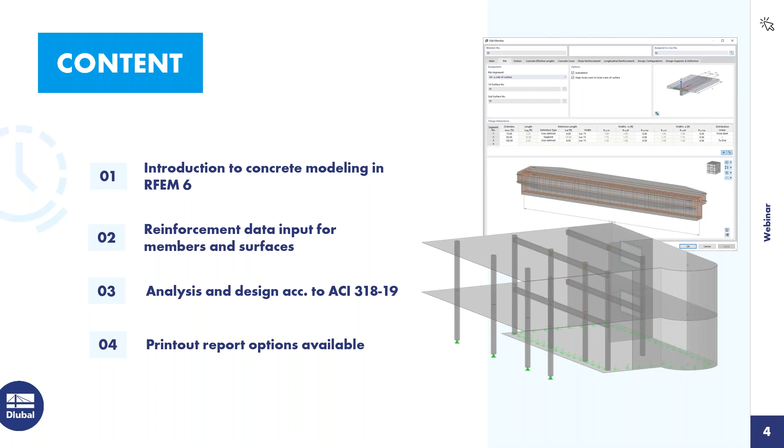As far as the content over the next hour today, we're going to move through a couple of examples, and we'll be working in our new FEA program, RFEM 6, as well as utilizing the concrete design add-on. So I'll give you a quick introduction to concrete modeling within our program. We'll take a look at reinforcement data input for both members and surfaces. We will be running an analysis and of course design according to the ACI 318. And finally, at the end, I'll show you a few printout report options that are available within the new program.

So we'll actually begin immediately within RFEM with our first example. When we begin a new file, we want to give it a model name. The type of model is set to 3D. On the second tab, you'll notice here are all of our add-ons. These add-ons would only be available if you've purchased them. Today we'll be focusing on the concrete design. You can see I've activated it here.

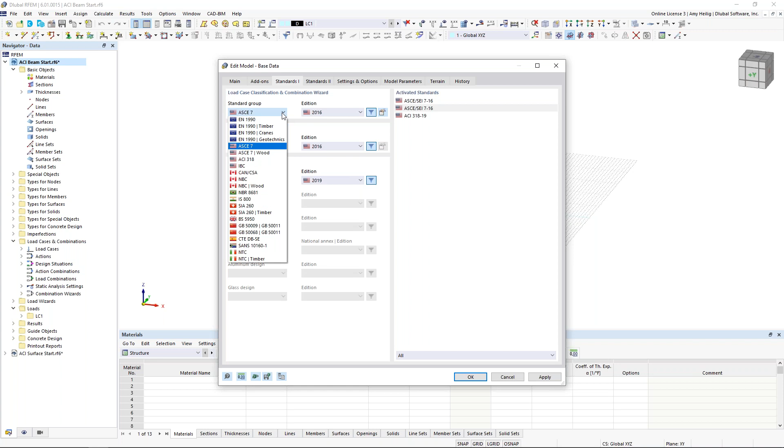Under the third tab, standards, this is where we can select the relevant concrete standard since we've activated that add-on. Today we'll be working with the ACI 318, but you can see here the Canadian standard, the Eurocode, and other international standards are available. As far as our load cases and combinations, we'll be working with the ASCE 7, but of course we can use our drop-down to select a different standard there.

And finally, under the settings and options, this is where I can orient my global and local axes. You can see I've set both of these Z axes to upward for the model here. Once we are done defining this basic information, we are brought into the main program RFEM here.

We want to start off with our drawing grid, which we can right click at the grid down at the bottom to edit. You can see that I have my grid point spacing set at 1 foot. If you have anything else here, you can either reset it or you can choose this option here, default. That will move it back to 1 foot on spacing.

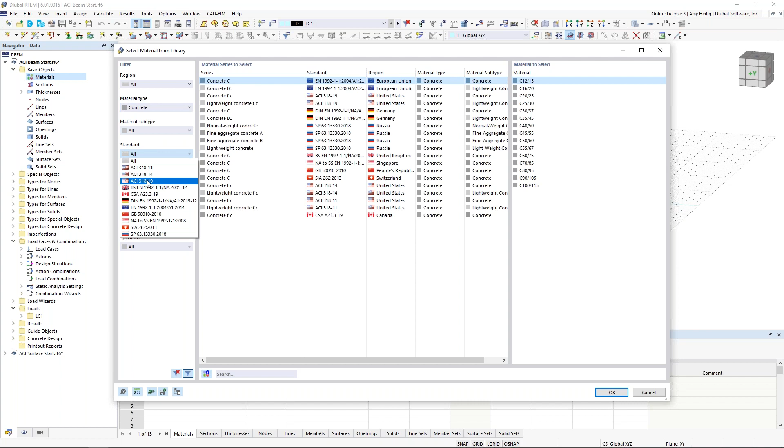We want to begin by defining a new material here. So we will right click within our navigator under the material to create a new material. This will open our dialog box within the program. We can then access our material database and we'll take advantage of the filters over here on the left. Within my drop down, I can choose concrete, I can select the standard ACI 318-2019, and from here I can choose my 4000 PSI concrete.

Notice on the second tab here with this concrete material, we also have the settings for creep and shrinkage. This comes into play a little bit later on with the serviceability design for long-term deflection if we wanted to consider that. We'll go ahead and leave this unchecked for our example today.

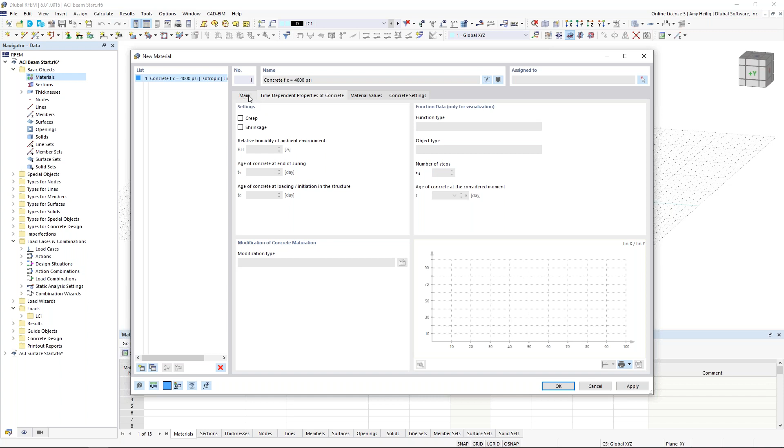Now, while we're still in this dialog box, we want to create a second material. So we once again visit our material database, and over on the left, we use our filters to reinforcing steel. Again, selecting the ACI 318, we can now choose grade 60. This is a little bit different in RFEM 6 than what we saw previously in RFEM 5, where we do want to go ahead and define that reinforcing material here for our concrete elements. Once those materials are defined, we'll see them over here within the navigator tree. Now we want to do the same thing for our first cross section.

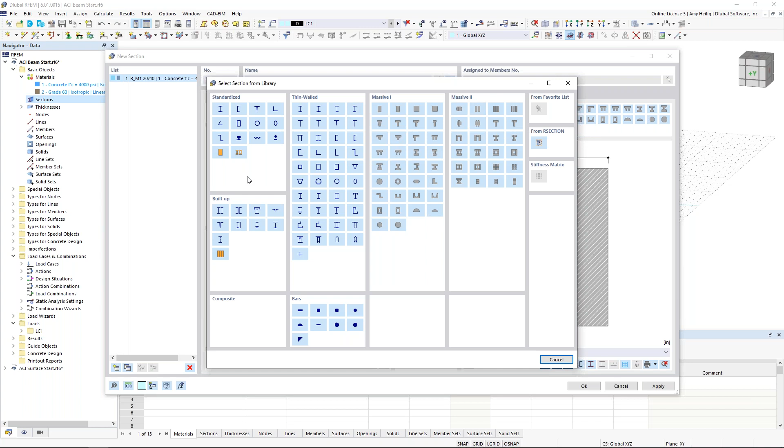So I can right click on the section here, go ahead and choose new section. And we'll see some of the various massive shapes available to us on the right. We can always visit our database here to choose from the library the various thin-walled and massive cross sections. We also have all of the available sections from the steel standards, aluminum, and so on.

But sticking with this basic rectangular section, under the second tab here is where we can go ahead and modify these dimensions at 12 by 18. The third tab will, of course, calculate all of the cross-section properties for us automatically. So we click OK, and now this section is available to us, and we want to begin by drawing our first member. So I can go up here to my toolbar to draw a new single member.

And what you'll see here is the member type is set to beam. Now notice the design properties is automatically checked on here. This is all related to that concrete design add-on that we activated within the base data. When we have this unchecked, notice all of these tabs disappear up here at the top related to our reinforcement. We will only perform an analysis if this option is not checked. But of course, we're also interested in the design portion for our example today. So we'll go ahead and leave this turned on.

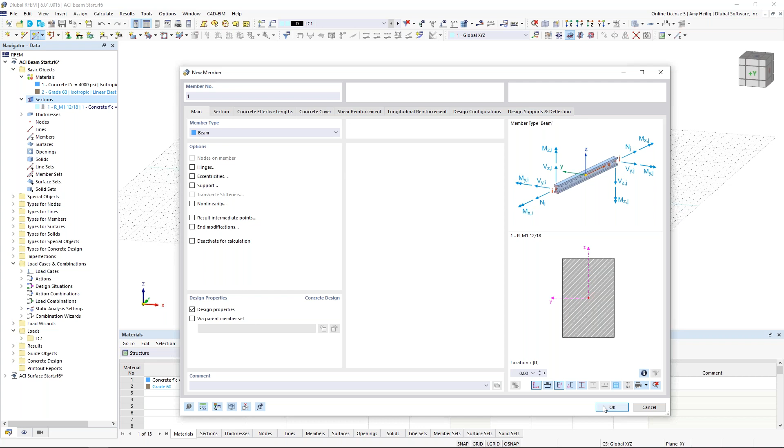We'll get back to some of these various tabs here in just a minute, but starting with the basic geometry here, I'm going to snap from my point 0, 0, 0, and my second point will be at 26, 0, 0. So we have our first beam element shown here.

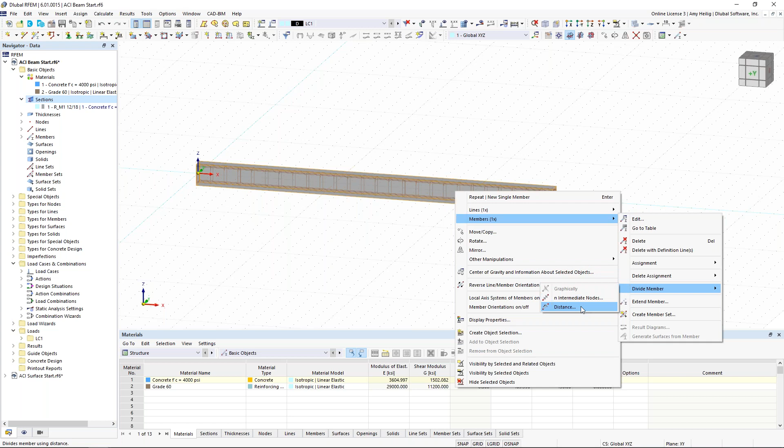Now I want to add a node along the member length here. So I'll right click on the member, and under members, we have the option here to divide the member by a distance. Within this dialog box, I can tell the program to go ahead and place that intermediate node 20 feet from the member start. But rather than dividing the member itself, I can choose this option down here to actually create the node without dividing it. So it will remain one continuous segment. I click OK. I can turn this into wireframe view, maybe turn off my grid. I can zoom in here and you'll see this node added along the member length.

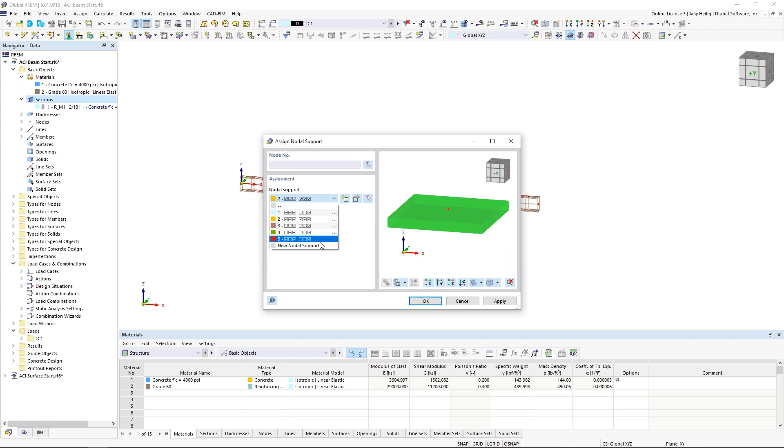So let us continue on by supporting this simple beam. So we'll go up to draw a new nodal support. And we have some default options within the program here, such as a typical pin support, maybe a typical rigid. We can also create a new support definition. So within this dialog box, we have our 6 degrees of freedom, 3 in translation, 3 in rotation. Now we also have partial fixity. So if we have something that's not fully fixed, not fully released, we can go ahead and define that spring constant there. And lastly, because RFEM is a nonlinear program, we can define these geometric nonlinearities for the nodal supports within our third drop-down box here.

For our first nodal support, we want to restrain the rotation about the global x-axis, which I can see back here in the background. I click OK for that first definition type, and then I can graphically select my node here, node number 1. Now notice I'm still within this dialog box. I can click Apply, and I can create a new nodal definition once more. This time we're going to release the translation in the global x direction for a roller. I click OK. I can graphically select my intermediate node here, and I click OK once again, and now our nodal supports are shown here at both these nodes.

Now, something new that we've added within RFEM 6, you can always right-click at one of these nodes and take advantage of this slider option to increase or decrease the size of those nodal supports.

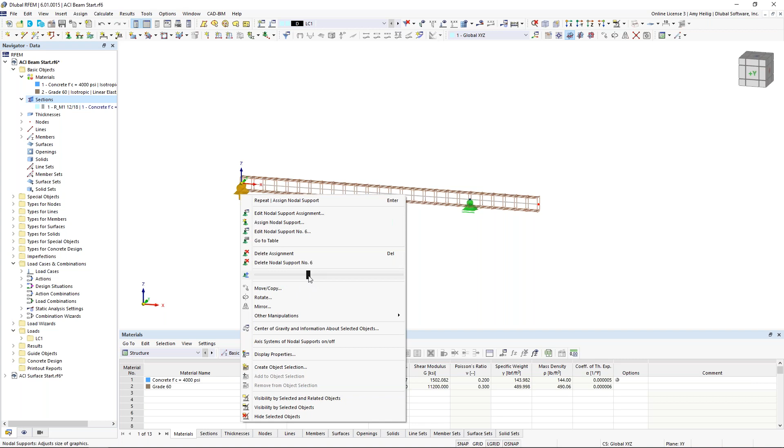Okay, so now that we have the basic geometry defined, let us move on to loading. Now notice the program has already created one default load case here. So if we go into this option, Edit Active Load Case, we can go ahead and rename the load case Dead. Now the self-weight is automatically activated here. The action category is set according to the ASCE 7 to dead load. So for our second load case, we will create this as live 1. The action category will be set to live. The self-weight will be automatically unchecked here because we don't want to account for it twice.

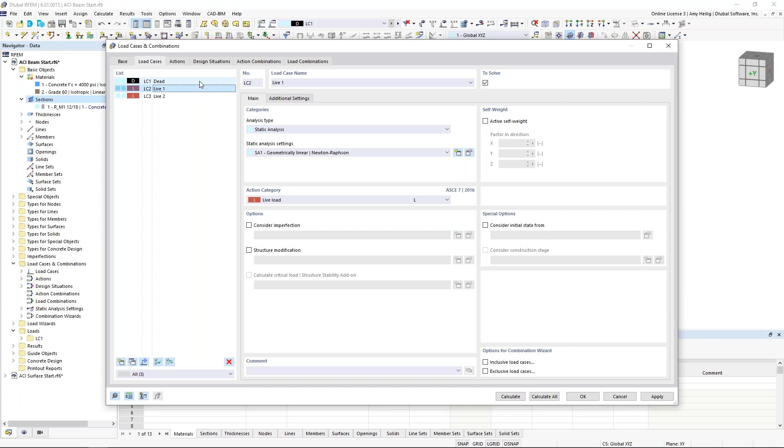And finally, for my third load case, I'll make a copy and simply rename this one Live 2. Now that all 3 of our load cases are defined, I want to take a step back here.

Under the first tab, Base, we will generate those load combinations automatically according to ASCE 7. This is what we set under our base data, but we can make a change to a different standard here. I also like to activate the option for combination names according to the action category.

Under the actions, we have both dead load and live load defined. Because we have 2 live loads under our load cases, we need to tell the program how to combine these within the load combinations, whether that's together, separately, or alternatively. We can choose those options from the drop-down box here.

Then we have our design situations, and this is new within RFEM 6. We have two design situations created, and these will be used for our concrete design. Notice we have LRFD for our factored load combinations and ASD for our unfactored load combinations. Both of them are active here for the concrete design add-on.

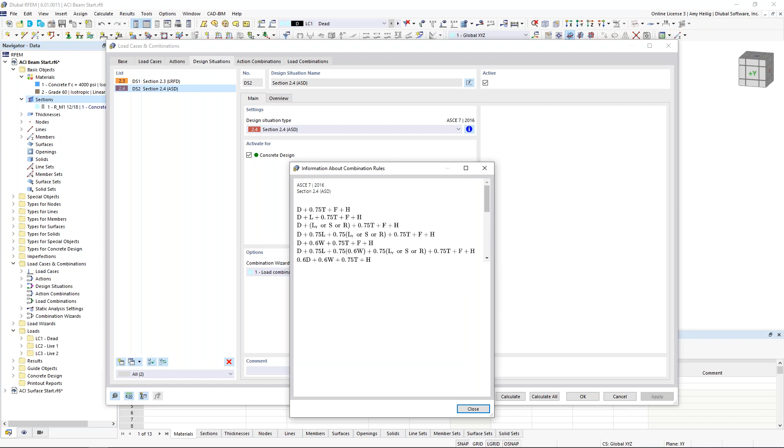Now, if we're curious to see what these load combinations look like, referencing the standard, we can click on this little info button here, and now we can see all of the load combinations in detail.

But there's something we also need to take care of within this combination wizard that's important for concrete design. For our factored load combinations, which will eventually be used for our strength limit state design, we know that we need to apply this I-crack factor that comes directly from the standard to reduce the stiffness. That's all done here within the combination wizard.

So I can go to the edit settings here. Notice the static analysis settings is set to a second order analysis with P-delta considered, which is great - that's exactly what we're going to be utilizing today. But we also want to turn on this option down here to consider the structure modification.

Now I need to create a new structure modification. I'll activate this for members since I only have one member in my simple model. Within the tab that appears here, I need to use the drop-down box to create a new member stiffness modification. And sure enough, within this drop-down box, we see the ACI 318 table 6.6.3.1.1A listed.

This is just going to reference the code to give you the I-crack factors for the various component types here. For today we obviously have a beam, so the I-crack factor of 0.35 will be applied to the bending stiffness here.

So I can click OK here, and then I'm going to want to either type in my member number or I can graphically select it. I click OK, and now for my factored load combinations, the I-crack factor will automatically be considered.

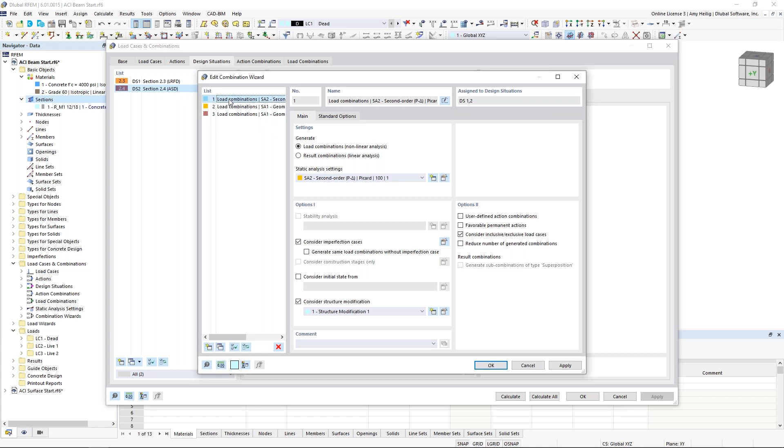Well, that's easy enough. If I go into my combination wizard and create a new definition here - previously for my factored load combinations, I was using item number 1 here with my structure modifications active.

Now for my third one that I just created, we want to choose a second order analysis according to P-delta, but I will actually leave this turned off. The concrete design add-on will go ahead and determine the effective moment of inertia I sub E for deflection calculations automatically. So nothing needs to be done here with serviceability or deflections for the ASD design situation.

We just simply need to deactivate those settings here under that third definition. So now under the load combinations, we can see our factored load combinations in orange, and notice the structure modification, that I-crack factor, is applied to these. Our unfactored load combinations here in red, this setting is turned off.

So now that we have defined the load cases and combinations, we need to actually apply the load to the member. We'll start off with a new member load within our toolbar here. The program asks us which load case to place this member load under - we'll choose dead load. Up pops our dialog box where we can simply define the load magnitude of negative 1.0 kip per feet.

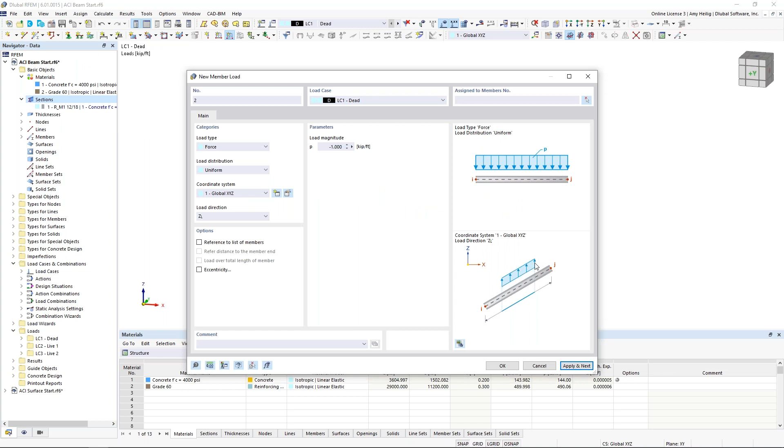And this will be applied along the full length of the member. I can graphically choose this member or type in member number 1. I hit apply and next, and notice in the background that load was applied, but I'm still within this dialog box.

What this allows me to do is drop down to load case number 2. I'm going to change the load distribution here to trapezoidal, and adjust my load magnitude at the start to negative 0.2. The end will also be negative 0.2, but I want to make sure to apply this only from point 0 to 20 feet on my beam. I'll type in member number 1, apply and next, and in the background we should see that live load applied only between our 2 nodal supports.

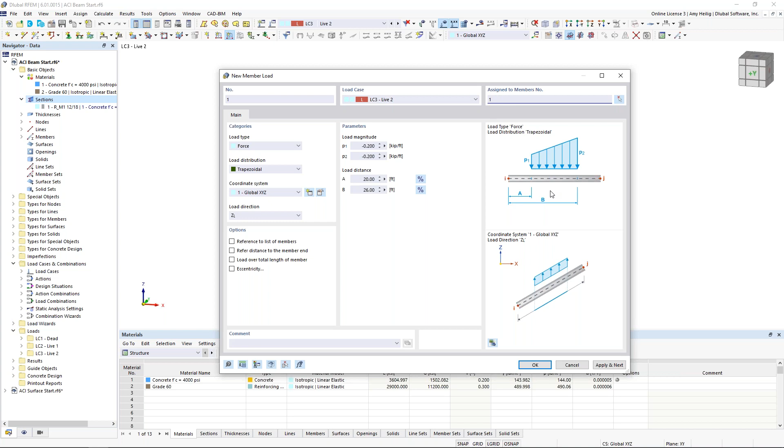Finally, we want to do the same thing with load case number 3. We're going to leave the load magnitude the same, but adjust this to start at 20 feet and go to 26 feet. We go ahead and hit member number 1 here on our keyboard, click OK, and now we should see that additional live load defined here.

Now within my drop-down box, I have the ability to cycle through these different load cases and combinations to view the loads applied to my beam, also including the load factors from the ASCE 7.

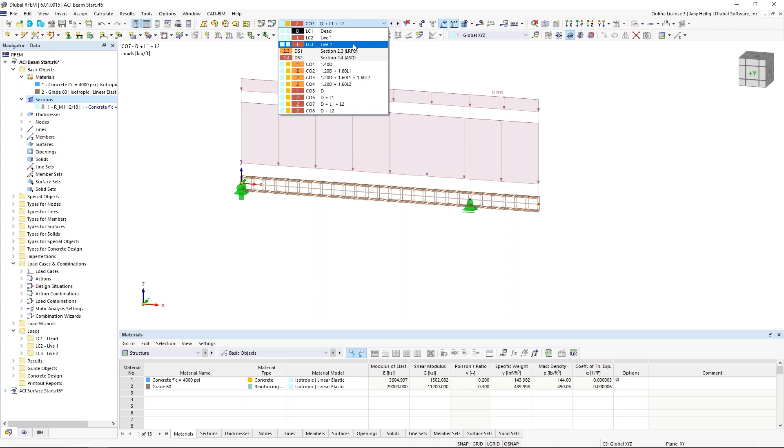Okay, so what we can do now is choose this LRFD design situation, and I can actually run a quick analysis. Remember, I haven't modified my reinforcement yet, so I'm not really doing the design quite yet according to the ACI. The program put in some default reinforcement to begin with.

But looking at just these static analysis results, notice we have a new tab here within our navigator, grayed out because it's the only thing we've solved for, but it says static analysis. We're probably not so interested in the global deformations for these factored load combinations, but what we can take a look at are topics like internal forces. You can think of these design situations as an envelope solution, grouping together all of those factored load combinations.

What you'll see here are 2 different values for all of my internal forces. These 2 values just refer to the envelope values, and currently I'm viewing both the max and min, but I can set this to only the max or only the min, and we'll see that adjust graphically. We also can display the support reactions. Again, these are just the internal forces, probably what we'd want to use to do our design according to the ACI.

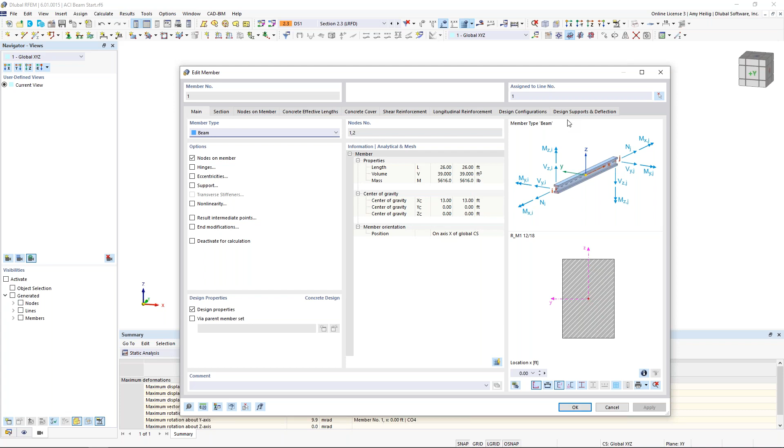So moving on to that topic, let's double click on this member to explore these other tabs up here at the top for our reinforcement definition. The first tab is the concrete effective lengths. I'm not going to touch anything within this tab, because when we don't, it's going to design the member according to a P-delta analysis. That is one of the approved methods within the ACI standard.

Now, alternatively, if I do define an effective length within this drop-down box, it will design according to the moment magnification method, also from Chapter 6, an approved method. But we'll go ahead and design according to P-delta today. Therefore, under our concrete cover, we can leave this as 1.5 inches, which is default here.

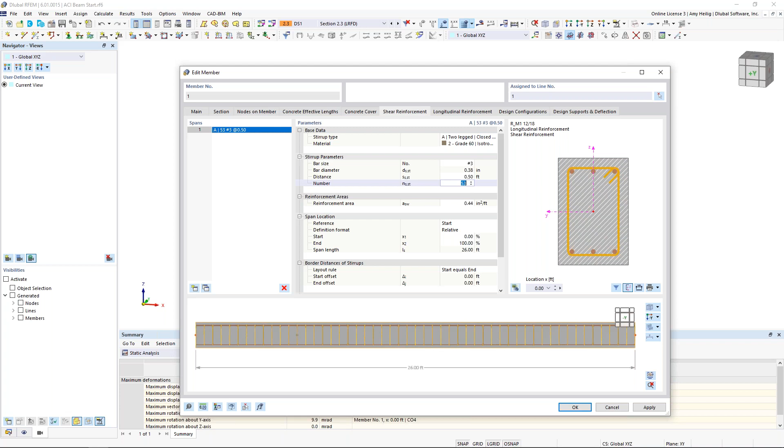Our shear reinforcement allows me to define different zones if I want along the member length. Notice I can create these different zones and adjust my shear reinforcement as needed. For our example today, we'll just go ahead and utilize these number 3s, but I'm going to modify my spacing at 0.5 feet, or every 6 inches. Notice this picture down here automatically updates with my shear reinforcement, applied along the full member length.

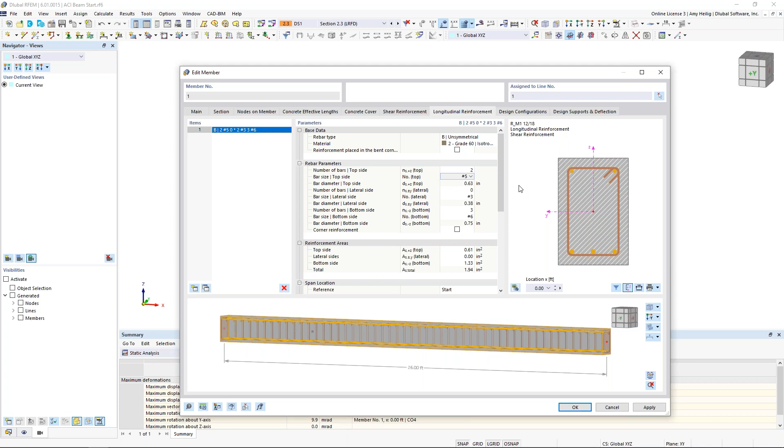Under my longitudinal reinforcement, this is where I'm going to set the longitudinal reinforcement as shown in this graphic, this cross section. I can use my drop-down box to choose unsymmetrical. This option gives me the ability to define 2 number 5 bars at the top of my beam, and we can see that picture update here. Along the sides, I'd like to define 1 number 4, again seeing those lateral bars update in the picture.

And then finally, we want to update the bottom. We'll go ahead and choose 5 number 5s from my drop-down box here, and we see those 5 number 5s shown within the cross section. So this is going to be applied along the full length of the member here.

What else we can do is define a little bit more information, such as reinforcement offset, but also anchorage type at the start and member end. This is all going to come into play for our development length design checks within the ACI, so we can make adjustments there. For now, I'll just leave this as empty.

Now, we of course have some additional positive bending moment in between these two supports, so perhaps this reinforcement isn't completely adequate, and we'd like to add some additional bottom reinforcement only at this location.

So what we can do here is create a new item. Up at the top, I'm going to choose from my drop-down box here the option D line, then choose 4 number 6s. Then I want to adjust my offset distance. This is all measured directly from the stirrup, and we can go ahead and modify this at 0 and 1.7. Then for the right-hand side of this line reinforcement, it will be 0 and 1.7 again.

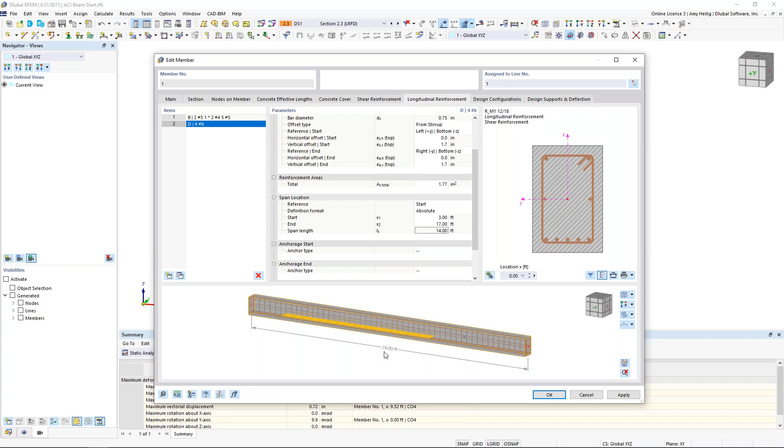Okay, so now we see that additional reinforcement, but right now it's shown along the entire length of the member. I'm going to actually modify this to begin at 3 feet and end at 17 feet, and now we can see the reinforcement shown here, which will coincide in between the two nodal supports.

Now, similarly, we probably have a negative bending moment over this intermediate support here and into the cantilever portion, so we'd like to add some additional reinforcement for the top of our member. So let us once again define here the option D for line, and we're going to choose here 2 number 5s.

Now, for this option with our offset distance, we want to use the drop-down box here to choose center, top, positive Z. Then I'm going to modify my offset distance to negative 1.2 and 0. I'm going to choose the same option here, center, top, positive Z, and this is going to be 1.2 and 0. So now we can see that additional reinforcement at the top shown here.

Now we don't want to run this along the entire member length. Rather, we are going to choose a distance here of 17 feet to 25.5, and now we have the additional top reinforcement defined over that intermediate support. So that will be all that's needed for this particular tab.

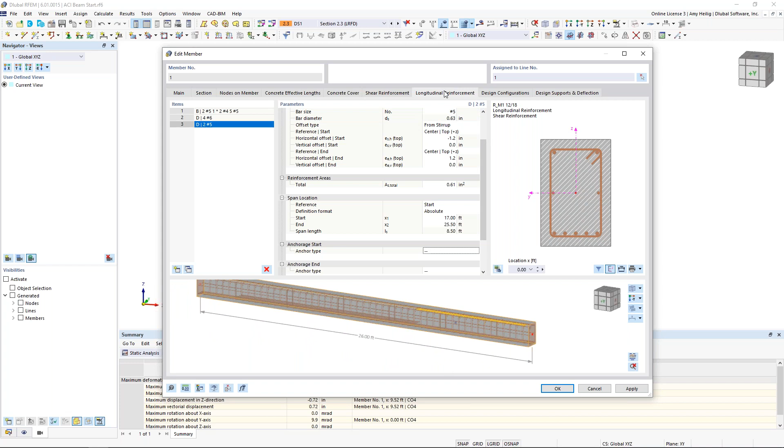So we'll move on to design configuration. We have strength configuration and serviceability, both coming with a default option. We can go ahead and edit the settings for this default. What you're going to see here are just the various options specifically for the ACI on what we can turn on and off for the strength limit state, such as strength reduction factors, and some minimums and maximums to consider directly from the standard.

Now the stability tab here is related to the moment magnification method. We're not running that for today, so nothing to take care of here.

As far as the serviceability configurations, if we take a look at this, you'll notice initially we're going to be checking the crack analysis. So what this is going to allow us to do is take into consideration section 24.3.2 from the ACI to make sure that our spacing of our longitudinal reinforcement meets the code requirements.

Now, additionally, we can turn on the direct crack width calculation. This is a bit more of a theoretical approach. It will utilize the Gergely-Lutz equation to calculate the crack width. We can compare this to the reasonable crack widths set forth by ACI PRC 224. So directly from that standard, we have some different options here that allow us to choose our limiting crack width. For example, dry air protective membrane, we can set this to 0.016 inches.

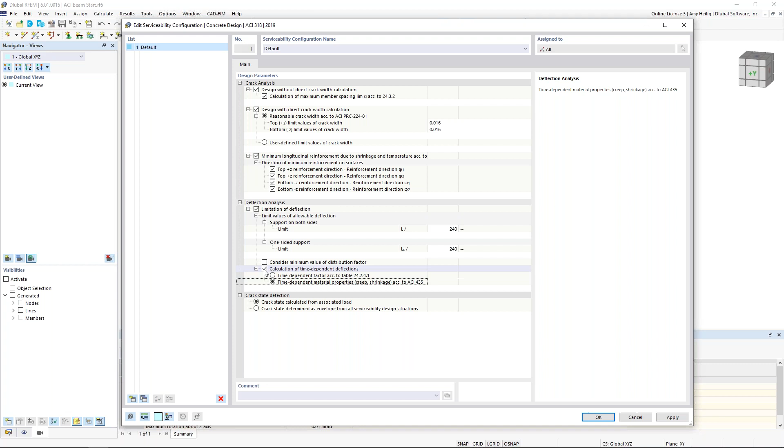So when this is turned on, we can choose the time-dependent factor according to table 24.2.4.1. This just applies a simple factor to the deflection analysis according to the ACI. Alternatively, we can consider creep and shrinkage here according to ACI 435. Now remember, I showed you the material properties itself allow you to define those creep and shrinkage properties. We'll go ahead and turn that off for today. We won't be considering long-term deflection, and we are done with the configurations here.

Now, the final tab is related to our design supports, and this is important for two different reasons. The first we'll start off with is deflections. So the program doesn't know which portion is supported on both ends, which end is a cantilever. So by defining these design supports, that gives the program the intelligence to recognize which limiting deflection ratio to compare the different segments to here.

And what we'll begin with is a new design support at the left-hand side. So I create this new design support. You'll notice the type is set to concrete. We give it a support width of 16 inches. The support depth is just set to the width of the member. We have a nice picture over here on the right-hand side, just referencing what some of these settings are.

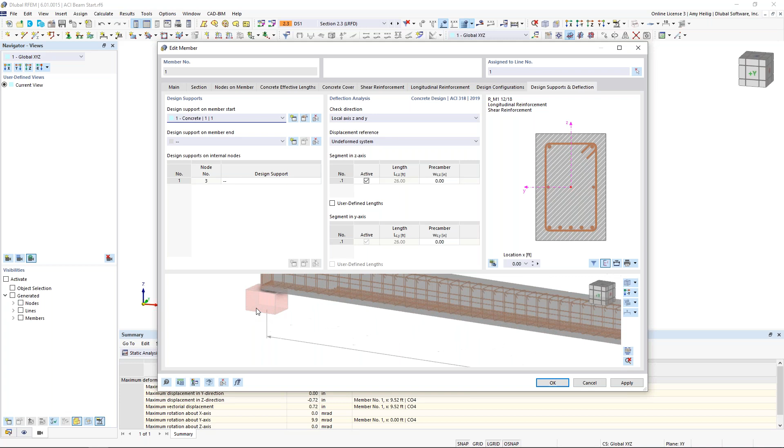Now we also have the ability here to reduce the moment. So we can set this factor for a moment redistribution over this support width. Now this is all related to the ACI section 6.6.5. So when we create that support width, we can automatically see it set here on our first node of our beam. Now we also want to set that design support on the intermediate node along the member length.

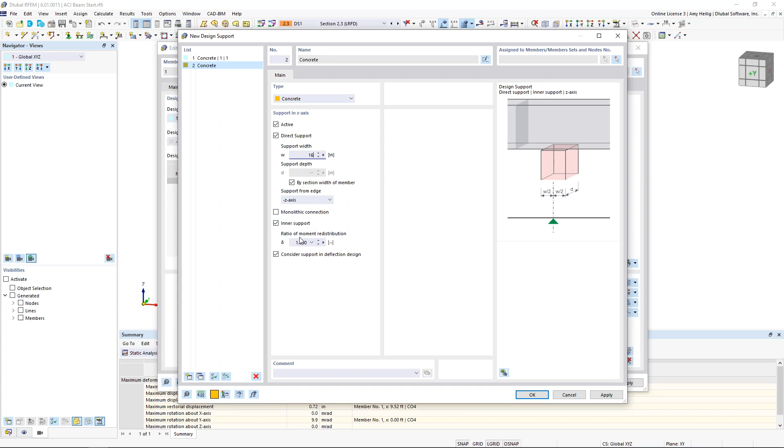So we can do so here at node number 3 by either selecting the support we already defined, or we can create a new definition. This one will also be 16 inches in width, but I want to set my ratio here, maybe 0.75. I click OK, and now we can see that nice design support shown here. So now the program will have the intelligence to recognize this is a cantilever portion out here on the right, and this portion here is supported on both sides.

Now, if you do not set any design supports within this tab at all, the program automatically defaults to a support at the member start and the member end internally. Now, these design supports are also important for a second reason, and this all comes to do with strength design when we're talking about topics like taking the shear internal force a distance d away from the support face. Well, this will all be considered now with these design supports that we've defined. Otherwise, of course, the program only knows the intelligence of taking the shear force, for example, a distance d away from the member start.

The information over here on the right is just related to the serviceability deflection checks. We can add in a pre-camber. We want to tell the program what is the reference length for our limiting deflection ratios, and that will sum up this particular tab here.

Okay, so now that we have finished all of these various settings, notice that the program has automatically updated my reinforcement. We can see those design supports shown here, and we can now move on to the design utilizing the concrete add-on. So within my table down at the bottom, I'm going to activate the concrete design here. So this is available because I have set this under the base data to turn on that concrete design add-on.

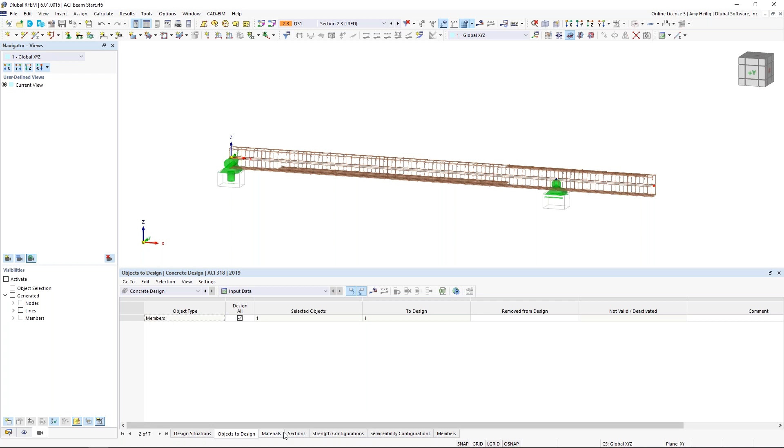Now the objects to design, we can see here we only have one element in the model, of course. The rest of these tabs are really just repetitive. It tells us our materials, our sections, so nothing to really do here. So we can begin by running our calculation directly within this table.

Now notice that the program will run through our load combinations here, and it's also running through the design portion. It solves pretty quickly, and we can see now we are presented with our results. So we're still within this concrete design add-on, and now within the drop-down box, I can look at my design ratios on my members. And here they are grouped together quite nice, showing the strength design, the serviceability, the reinforcing limits, and the detailing of the reinforcement.

All of the design ratios here are green. That's always a good sign rather than seeing red, which means we're over the design ratio of 1.0. We can also utilize these filters up here at the top. If we wanted to view maybe only the max ratio, we can select the max here. Otherwise, all of them will be shown. Now notice as I click through this, the big red arrow showing in this graphical interface here will determine where my controlling internal force is.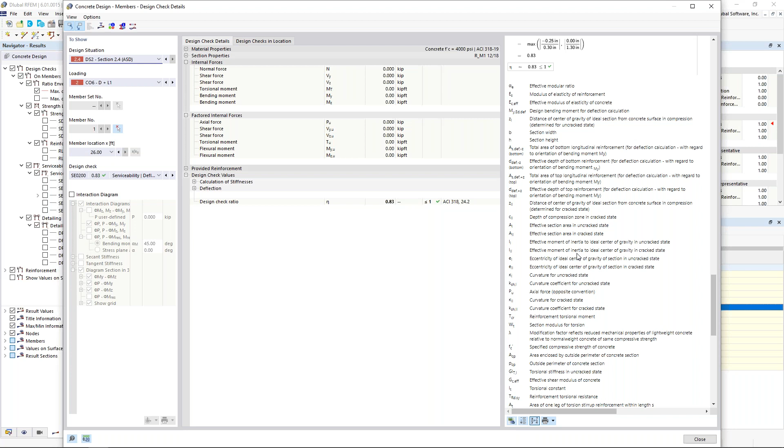The other new thing within RFEM 6, for any one of these design ratio checks, what I can do here is to visit my design check details. So this is going to launch this dialog box that is going to show all of my code equations here. So notice this one is pretty long and complex, but we show every single equation. Down at the bottom, we're going to give you every variable definition. We're also giving you all of the code references along the side as well.

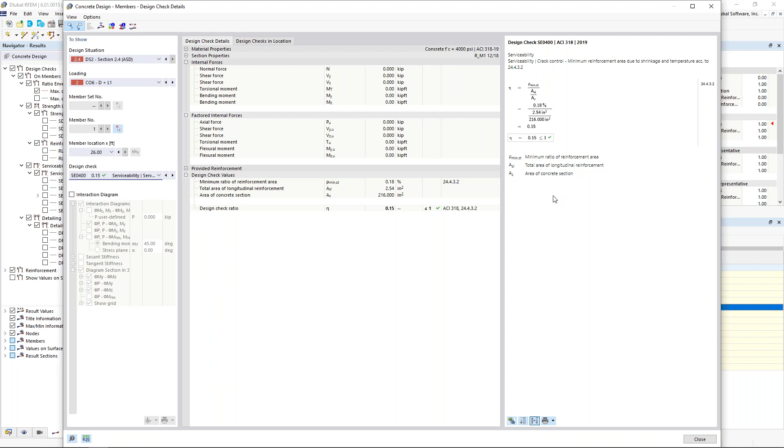So we can use any one of these checks here. Currently, we're looking at serviceability. We can take a look at any one of these other checks to determine the ratio here for our other various serviceability checks. Now, alternatively, we can take a look at any one of the strength design checks as well. Same concept. We're going to see all of those variables listed again with all of the code references.

What else is pretty powerful is we can view the diagram in section. And this is showing me which portions of this concrete section here are in compression, which are in tension, and we're also giving you the stresses for each of the rebar here. So this information is all available to us, of course, in our table format, but now we have this new drop down here for concrete design. And we can see if we collapse these trees that we have two options here, the design checks or the reinforcement. So let us take a look at the design checks first.

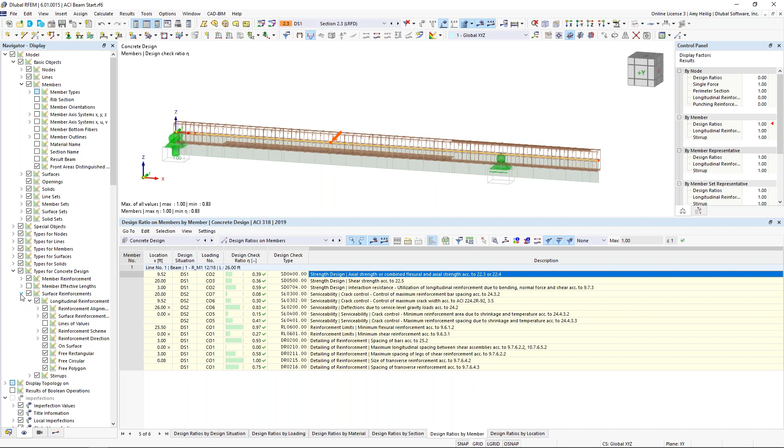Also, I can turn off my reinforcement on my member by visiting my navigator display options. And here we'll see types for concrete design, and I can turn off my member reinforcement. So going back to my member design check results here, I can turn off maybe the max ratio and turn on any of the various checks related to my color coding here, which all relate back to the table design ratios.

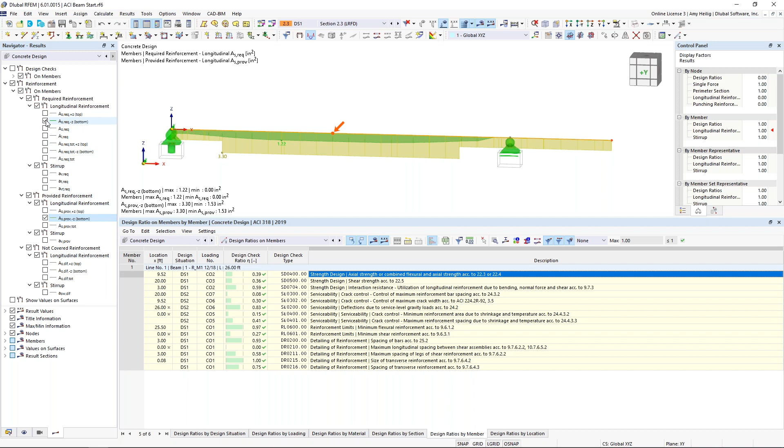Now, in addition to viewing the design checks, we also can take a look at the reinforcement along the member. And what I mean by this is we can view the required reinforcement at the bottom of the member. This is strictly from the analysis. Well, on top of this, what we can do is to overlay the provided reinforcement on the bottom. So what we would always hope to see, of course, is that the provided reinforcement is greater than the required reinforcement.

And in a similar fashion, we can turn on the required reinforcement for the top, which makes sense. We see it over here along the support and into the cantilever. What we can do is to overlay the provided reinforcement at the top. And again, this is greater than the required. So some various options there in terms of how to graphically view these concrete design results, both in table format as well as within the graphical options.

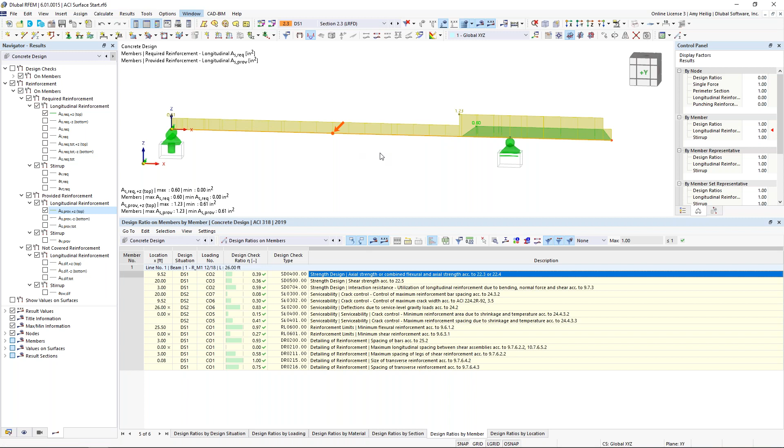So that will go ahead and wrap up our first example here. I wanted to give you an introduction to just a simple beam design. For our second example, let us move into a little bit more of a complex structure. So now we have an entire building here. We have columns, beams, walls, and slabs all defined with reinforced concrete. Now, the first thing here is I've already set up the load combinations, taking care of a lot of this information that we just did with example 1. Let us go into our design situations that we already covered.

So again, we have LRFD and ASD, and as we mentioned before, we need to set those I crack factors for our factored load combinations for the strength design. Well, I went ahead and did so. I just want to show you guys how this differs a little bit when looking at the structure modification here.

Now you'll notice I've activated both members and surfaces. We have two tabs up at the top, and I have set the I crack factor for my columns. I've selected all of the column members here. I also see my beams, and I've selected all my beam members. And under my surfaces, we have set the I crack factor according to the ACI for walls uncracked and flat plates and flat slabs.

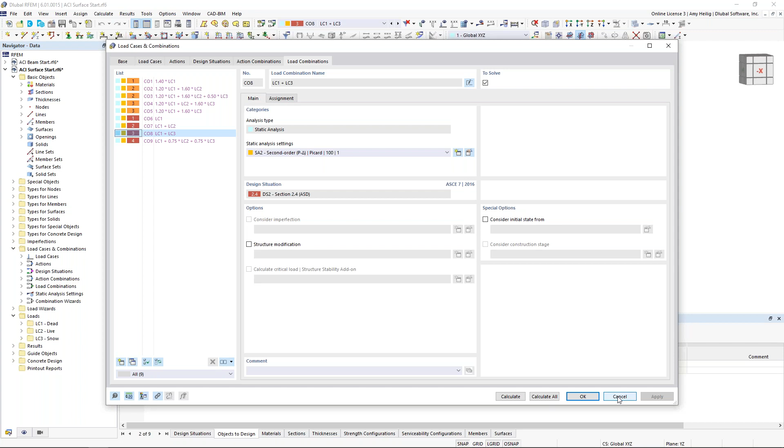Now, just to go into these detail settings, I also wanted to mention that in a similar manner, we have the Canadian standard here. It's the same concept for designing according to the CSA standard, so that option is also available here. Okay, so now that we have defined these structure modifications for our factored load combinations, I created an additional combination wizard for my unfactored load combinations, which should not have any stiffness reductions. So we'll see that reflected here within our load combinations, just like what we saw with example 1, but now we have many more elements.

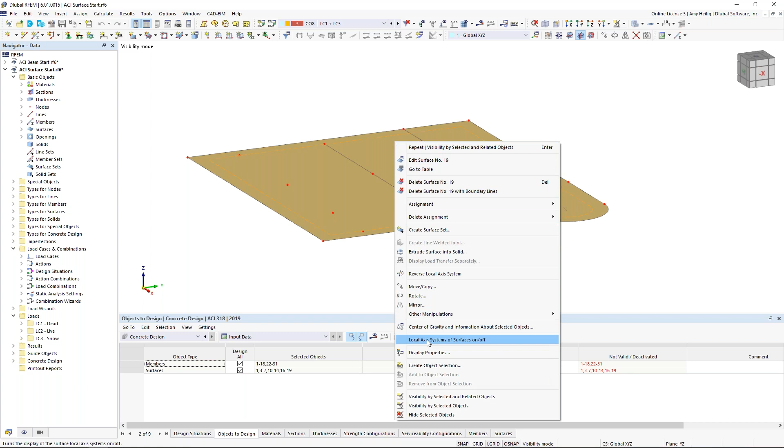So let us begin with the reinforcement definition for our first surface. And we'll choose this slab located here in the center. And I will go ahead and create a visibility by the selected objects. I'm also going to right click on this surface and I'm going to turn on the local axis system. Turn this to wireframe view as well. The local axes are important for the reinforcement directions, which we'll see in just a minute. So I wanted to go ahead and set us up for that. So all we need to do is to double click on the surface here.

Now, just like with the members, with the design properties turned off, which is the case with every single element within this model right now, we're only running the analysis. But when I activate the design properties, we see all of our additional tabs here where we can define our reinforcement for the design. So let us move to the concrete cover. And we'll begin by defining a new concrete cover of 0.75, just referencing table 20.5.1.3.1 from the ACI. Sorry about that. Okay, now the concrete design properties.

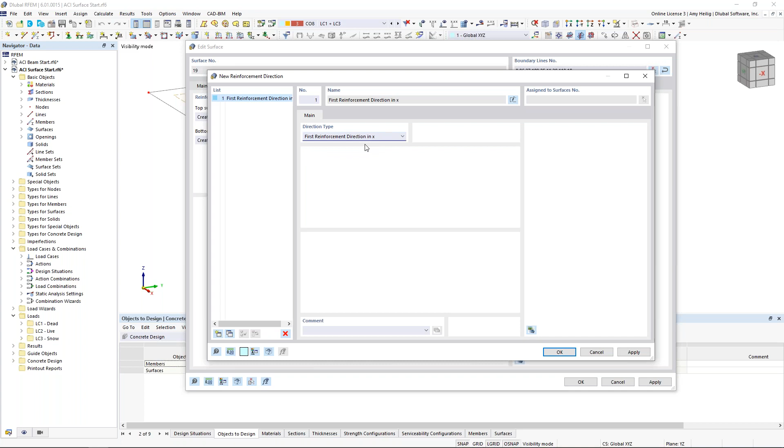This is going to be where we set our reinforcement direction. And we have no reinforcement direction defined right now, so let's create a new one. The reinforcement direction is going to be related either to the local x-axis or the local y-axis of the surface. So this is why I wanted to turn on the local axes so you can understand how the reinforcement direction is influenced by this. We'll begin with the local direction x for the top side as well as the bottom side. So we're utilizing the direction based on the local x-axis, and the transverse direction would be the local y-axis. Now, of course, you can rotate this too. It doesn't necessarily have to be in either one of those orthogonal directions.

For the surface reinforcement, we create a new definition here. And we're going to apply the reinforcement over the entire surface. My reinforcement material is already set at grade 60. The reinforcement type can be welded wire mesh, we have the library in there, it can be rebars or it can be stirrups. So perhaps we want to define some additional shear reinforcement around our columns, for example. But we'll go ahead and utilize the rebar option, and we will choose number 5s at 12 inches on center or 1 foot.

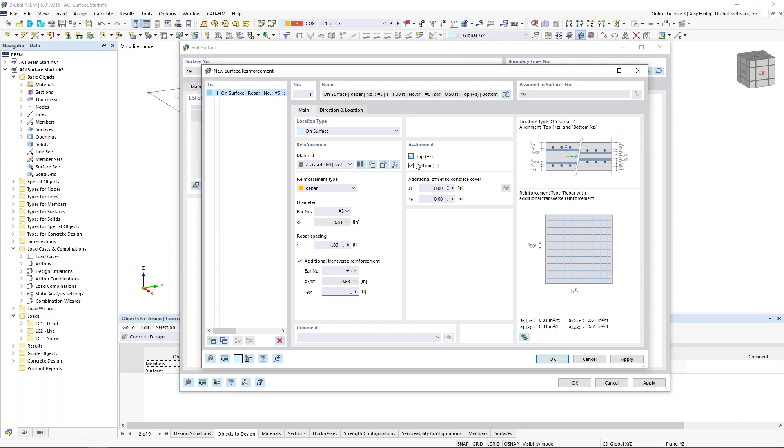Now, we also want to apply this in the transverse reinforcement direction. So notice right now it's only spanning one way. When we activate this, we want to choose number 5s, spanning 1 foot in the orthogonal direction here. So we see the picture update over here on the right. Now, we're applying this to both the top and bottom of the surface. So I've created this first definition type here. We can see it populate here within our table.

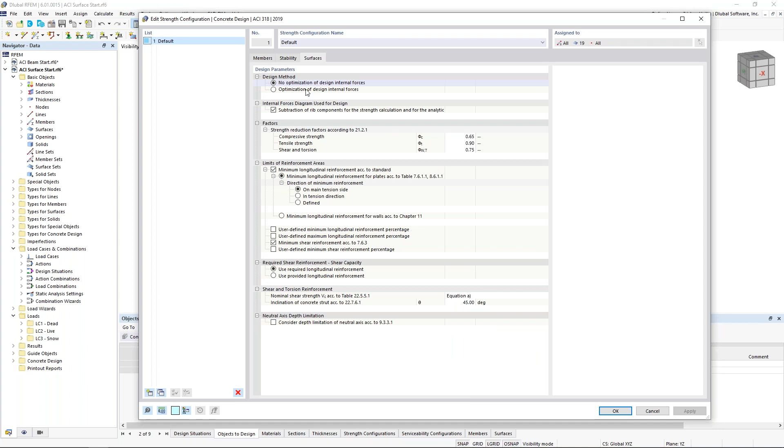Okay, so the design configurations, really same concept here of what we just talked about with our first example. Just notice that we now have an additional tab here for surfaces. So just some various settings specific to the ACI for our strength limit state design. Serviceability, same concept we've already discussed within the previous example, but just know that we can check deflections for surfaces as well.

So now that we have defined our surface reinforcement here, we can click OK, and we see this graphically update here with our number 5s at 12 inches on center. But if I go ahead and right click and show the hidden objects in the background, we know that we have these columns framing up into the slab here. So we're probably going to have some additional negative moment at these locations. So perhaps I'd like to add some additional top reinforcement, but only at these locations. We don't want to apply it to the entire surface.

So if we take a look back at our navigator here, we see the types for concrete design. And here's our surface reinforcement. That surface reinforcement number 5s at 12 inches on center is defined within this tree option. Well, I can right click to create a new surface reinforcement, and this dialog box should look familiar, but this time we're going to choose the option free rectangular. So here we can define additional rebar, and I'm going to choose again number 5s at 1 foot on center. And I'm going to also define the transverse reinforcement, number 5s at 1 foot on center. I only want to apply this to the top of the surface, not the bottom.

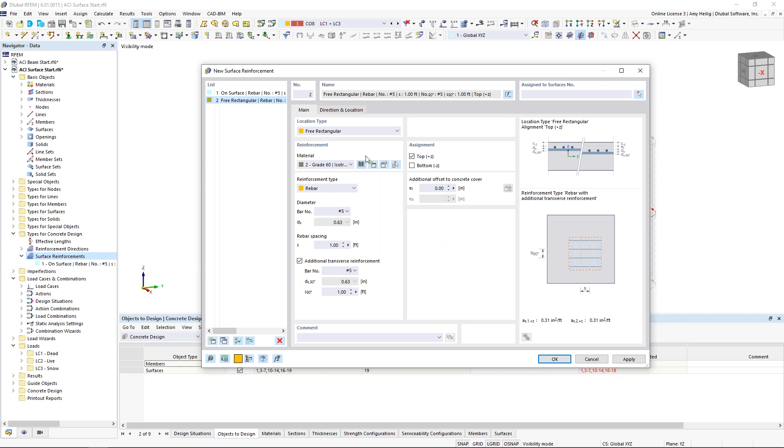Now, we could take this a step further and apply an additional offset here. So perhaps we wanted 2 layers of reinforcement within our concrete slab. If we do not define any offset, the program is simply going to apply this area at the same location as my previous surface reinforcement that we can see as item number 1 here. The direction and location tab, I'm going to choose the option center and sides of rectangle. This allows me to graphically choose my point here, and I'll choose the top of one of these columns, 18 and -11. I define the size of my rectangle, 6 feet by 6 feet. And then I can graphically choose my surface here I'd like to apply it to.

Now, this picture represents the fact that we can actually project down this reinforcement over multiple levels. So if we have a multi-level story concrete structure, and we know that this same free surface reinforcement should be applied at every single level, we can define multiple surfaces here, and the program will automatically place that at every story level. Okay, so once we click OK, we should see that additional reinforcement here.

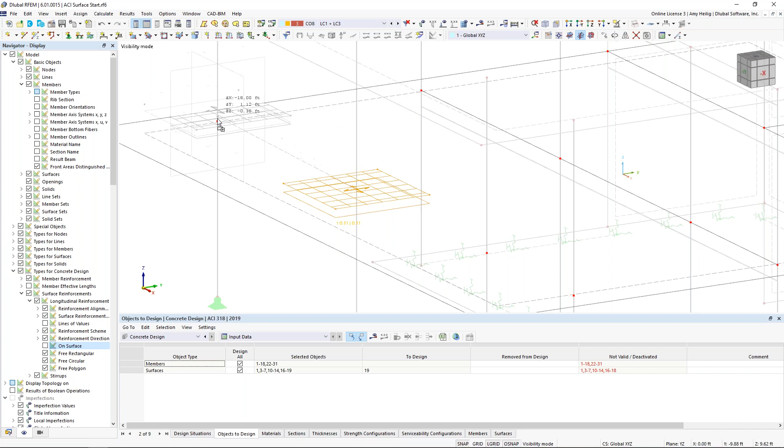Now, it might make it a little bit more clear under our display navigator. I am going to turn off the surface reinforcement here on the surface itself, so we only see this rectangular surface defined here. Additionally, what I can do is to select this, hold down my control key, and actually just drag and drop it to different locations on my model that I know I'm going to have a little bit higher of a negative bending moment. I also have some areas back here where we intersect with the walls and columns that need a little bit more reinforcement on the top. So of course we'd want to continue optimizing this best we can based on the internal forces. Again, we probably want to add some shear reinforcement and such to the slab.

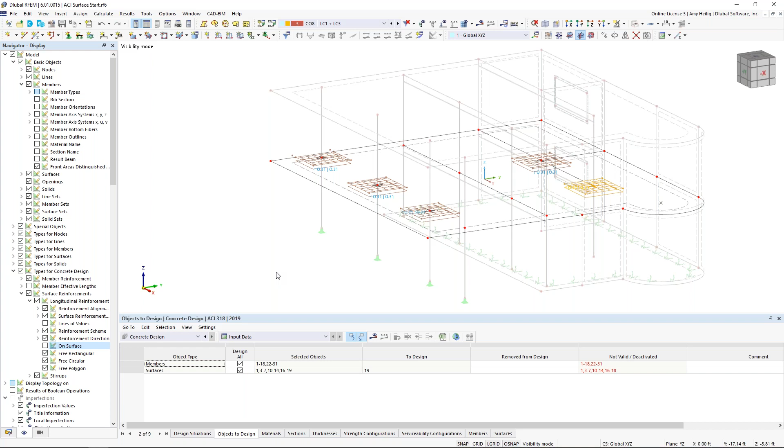Now, taking you to another little side note here, punching shear, this will be ready actually, hopefully in several weeks for the ACI. It wasn't quite ready for this presentation, so we're not checking that right now, but that should be very close to being done within the program.

So once we have defined our surface reinforcement, we can actually begin the design. But before we do, I'd like to define a little bit more reinforcement for some of these other elements within the structure. So let me turn off the free rectangular, and I will turn off the local axes of the surfaces, and I'll cancel this visibility mode and turn this back into the rendered building here. So notice we have these beam elements drop below the bottom of these slabs. Well, these are special members. If we double click on them, the member type is set to rib.

So what a rib element allows us to do is to actually design this as a T-beam, so integrating it into the slab directly. So what we do is define the rib alignment here on the -Z side of the surface. Now, what's new within RFEM 6 is that we allow you to vary the effective width or the flange dimensions along the length of the member.

So currently the default is just L/6 over the full length of the member. But what we can do here is to change this to maybe 85%, and we'll modify this to the segment, and we will set this to L/8 instead. Now from 85 to 100%, I'm going to use my definition type here to user define. We will set this to 6 feet, and we will go ahead and select L/8 once again. So notice that the effective width transitions clearly here at 85% to a smaller value.

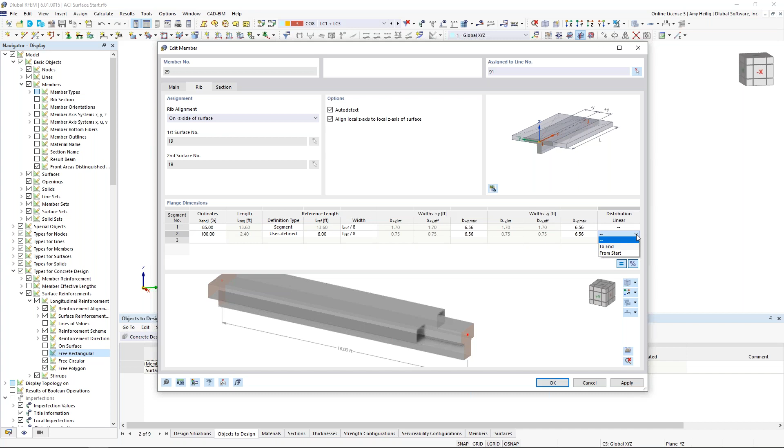Now, what else is new is that we have this option within the distribution linear column down here at the end to linearly distribute this to the end. So notice at 85% to 100%, we have a clear line transitioning back to the end of the member. So this is all done as we approach the interior column here. So that effective width is set for that rib member.

Now I went ahead and did it for the rest of these members. You'll notice here for this particular rib section, if we zoom in, we have this linear distribution at both ends as it spans between these interior columns. Maybe up at the top though, we want to also utilize these rib options, but for these, what I went ahead and did is just set these without using that distribution option down at the end. So we have a clear, distinct view here of where the effective width changes at 85%. So either are possible within the program.

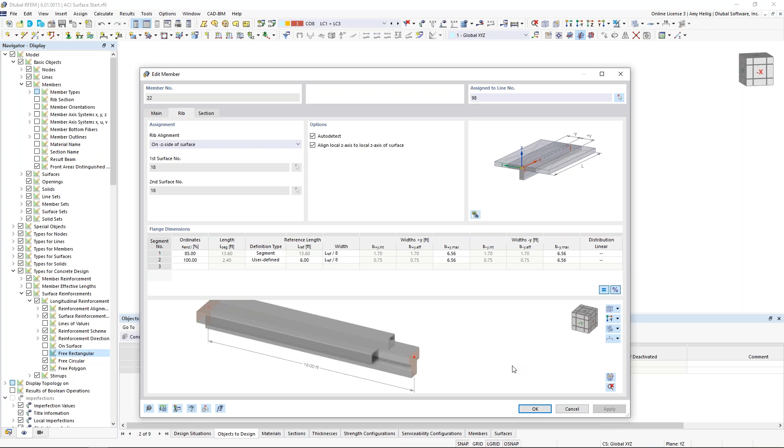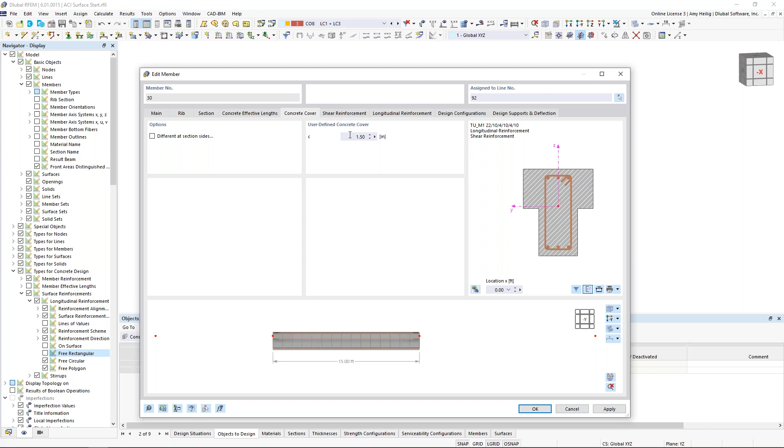So let us begin by designing this rib member here in the center of that lower level. Now remember, everything has been turned off for the design property, so we want to activate that now. And we are going to take a look at the concrete cover. Remember, the effective lengths we leave empty. We're not designing according to the moment magnification method, but rather P-delta. The concrete cover, we will leave this as default at 1.5 inches.

Now for my shear reinforcement, I actually do want to have 3 different zones here. So I can zoom in, and for my first zone of my shear reinforcement, we want to choose number 3s, but we'll go ahead and have a tighter spacing here of 4 inches or 0.33 feet. Now I want to modify the distance here of this zone so that this is applied from 0 to 3 feet. And now we can see our picture update down here at the bottom.

My second zone is going to be number 3s, and we're going to modify this spacing at 0.5 feet or 6 inches. This will be applied from 3 feet to 12 feet. And finally, for our last zone, we want number 3s at 0.33 feet. So that will be that 4 inches there. And this will be applied from 12 to 15 feet. Again, everything is updated within this picture.

For the longitudinal reinforcement, notice we have some grayed out options here. So what does this refer to? Well, if I take a look along the length of the member, we can actually consider automatically the surface reinforcement. Remember those number 5s at 12 inches on center that we defined? You can see them displayed here in the effective widths or the flanges. Well, we can also turn this off and manually apply reinforcement as well, which is what we'll be doing today. So we'll begin first with the basic longitudinal reinforcement here within the main member.

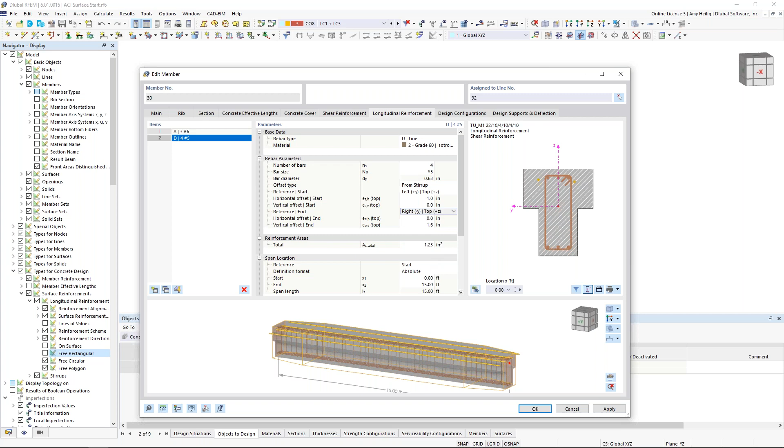This should be right, positive Y which we see here, but top negative Z. We want to go ahead and modify this to a distance of 1 and 0. If we expand the distance to get a larger effective width for our flanges, this will make more sense as we see our reinforcement on top. We definitely have to play around with this to get those offsets correct with the display options. This will also be applied along the full length of the member.

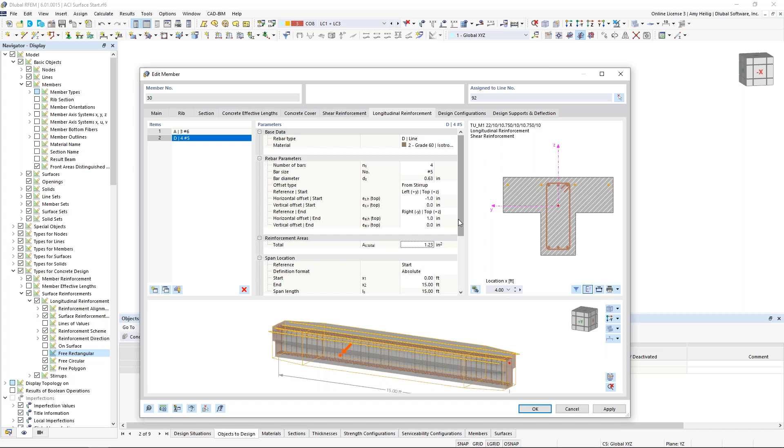So, design configurations we've already covered. For the design supports, if we do nothing within this particular tab, the program will just treat it as supported at both the member start and member end. Perhaps we'd want to take into consideration the fact that this rib is framing into the column, so we'd want to set those design supports here. But for our example today, we'll go ahead and leave that empty. Now we should see the reinforcement drawn graphically here within the model.

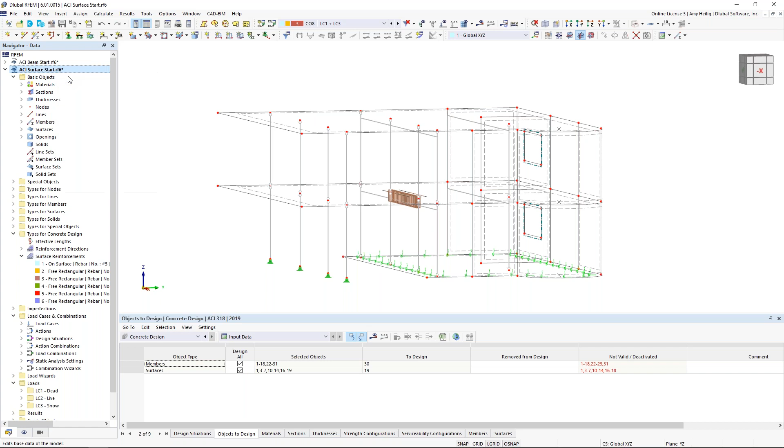The final thing to do is set the reinforcement for some of the columns. For this, I want to go back to my navigator and right click to visit that base data. If you remember when we began our example, we can revisit this dialog box. Under these settings and options, I can activate what's called member representatives. Up pops a new tab at the top, and what the program can do is group together members based on similar materials, sections, lengths, and so on.

I've also activated comments here. So what we'll see when we click OK is a general color coding of all those elements grouped together that have those similarities.

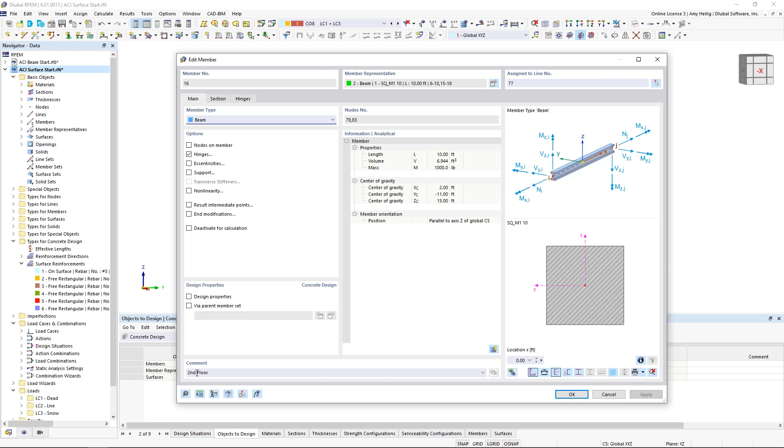Now, the columns at the first floor are actually identical to the columns at the second floor. So how I differentiated them is by typing in this comment at the bottom for those members, second floor, and automatically the program will place them into a different member representative group. We can see this denoted by this green color. So what I can do is double click on the green color itself, and up pops all of our member representatives.

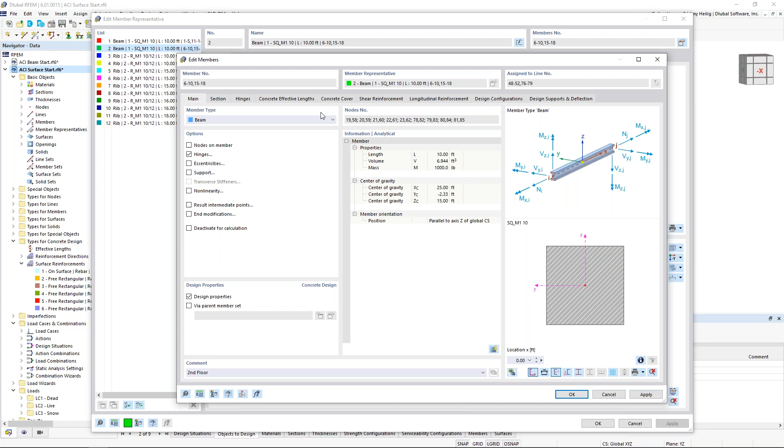We'd like to define the reinforcement for the columns. Currently members are listed here, and I'm going to go into the edit settings. I have the design properties turned off, so we're going to turn those on. I'm not going to define the reinforcement here, because if I do so I'm actually defining that individually for each member. Rather, when I click OK you'll notice I'm still within the member representatives, but now I have the exact same tabs available. Why this is beneficial: if I go into my member representatives and make a quick change to the reinforcement, that's going to update all of my members that are grouped together.

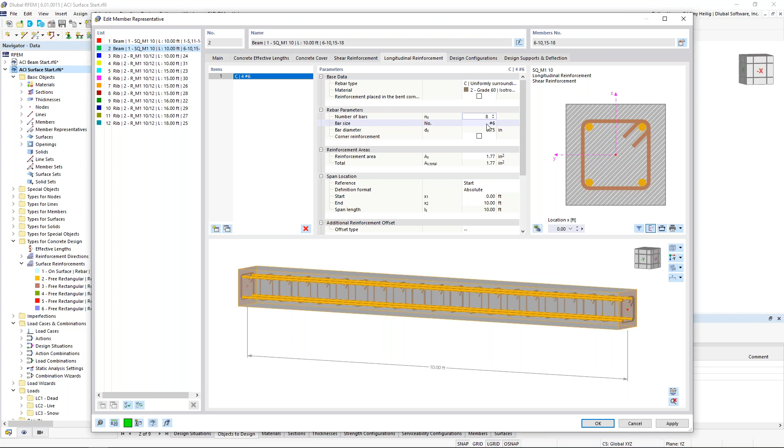So once again, we will visit the concrete cover, 1.5 inches, the shear reinforcement. We want to modify this here. We'll change the spacing to every 6 inches, 0.5 feet. We see our picture update here. For the longitudinal reinforcement, we're going to use our drop-down box to choose uniformly surrounding, and we're going to choose 8, number 6 bars here. We can see again the picture updates accordingly.

These are applied to the full length of the member. I click OK, and what we should see now is all of our reinforcement for every one of those columns at our second floor. So now that we have defined the reinforcement for the surface, for this rib element, for the columns, let us move into running the calculation for both the analysis and the design.

So remember, we want to utilize this drop-down box to visit our concrete design add-on for the input data. LRFD, our factored load combinations, are going to be set according to the strength design. Our unfactored ASD load combinations are set according to the serviceability design. The objects to design: well, we have a lot of red elements here, and that is simply because we have not defined the design properties.

I didn't turn on that checkbox. I didn't set the reinforcement. So therefore we're going to get errors if we try to design everything within the model. Rather, let us turn off these checkboxes here, and I'm going to graphically select surface number 19, and then I'm also going to graphically select my rib element here.

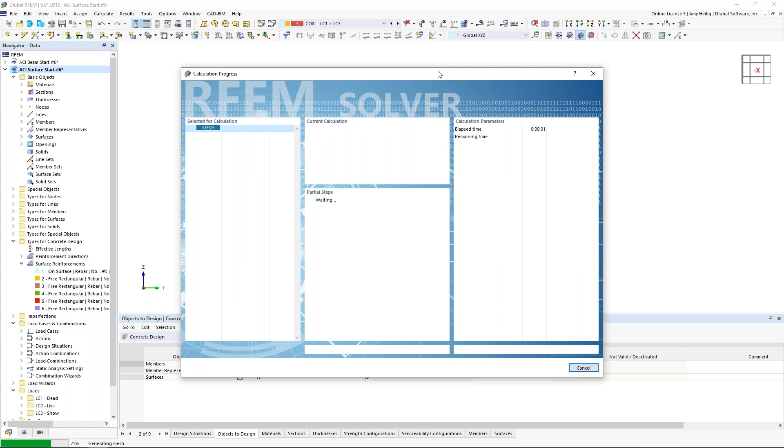And I can also utilize my selection box here to choose all of my columns at the second floor, and I click OK. So now only the relevant members and surfaces will be designed here. The rest of these tabs down at the bottom, we discussed that is just a little bit of repetitive information, nothing to do further, and we will begin the calculation.

So new within RFEM is utilizing the multi-core processor within your computer. Notice that these load combinations, both the factored and the unfactored, are going to solve at the same time, even for these larger models such as this building. Previously in RFEM 5, we had one solve after the other. So these are all complete. Now notice under the concrete, we have to solve again all of the unfactored load combinations.

And the reason for this is, remember, we talked about the effective moment of inertia, I sub E, and that is related to the ACI table 24.2.3.5. The program automatically calculates that stiffness reduction to be considered for the serviceability deflection checks. So that's why we're seeing those load combinations listed again here.

Now, the final progress bar is just going to be showing us how all of this information is compiled into the table format as well as the graphical format here. So this should solve in just a couple more seconds, and we will be back in RFEM with the results.

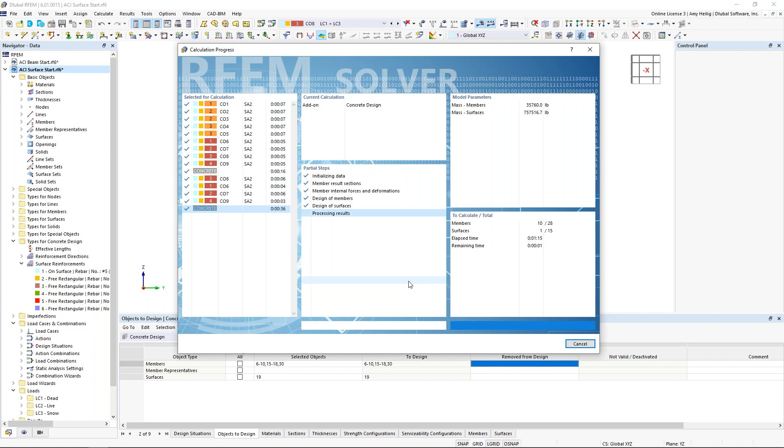Okay, so now that this is complete, what you'll notice here is we are viewing the overview from the concrete design. So any errors, any ratios that are greater than 1, we would see that listed here. So let us jump down to the design ratios on the surface.

And it actually doesn't look too bad. Everything looks green except for, of course, the shear resistance. Inevitably, which I can go ahead and show this to you guys here, the reinforcement on the members is just simply needed for these areas where we have the column intersecting with the slab and at some points where the wall is intersecting as well. So what we'll see listed here otherwise is the design ratios for strength, again, reinforcement limits and serviceability.

Now, for these checks, we can visit the design check details, and similar to what we saw with our member design, it's a similar concept for the surfaces. This one you can see is rather complex, but all of the code references, the equations are listed here. We can also utilize this drop-down box if we want to jump to one of the other design checks here. This one's a little bit more simple, again, with the code references given to us on the right-hand side. So very similar, again, to what we saw before with our members.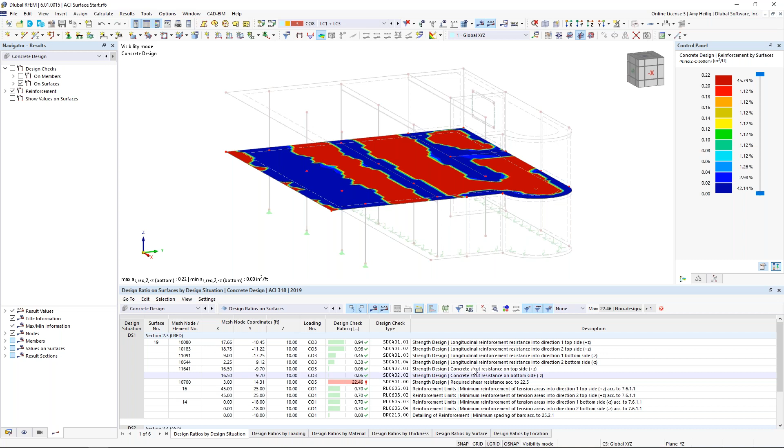So similarly with the members, we have the results available to us in the table format. So let me cancel my visibility mode here. And let us move to our drop-down that shows us the design ratios on the members. So currently we're viewing this tab, design ratios by member. Notice that when I click in here, we're shown exactly where that controlling internal force is for this particular column. I'm not going to spend too much time going over the results because we've already seen this with example 1.

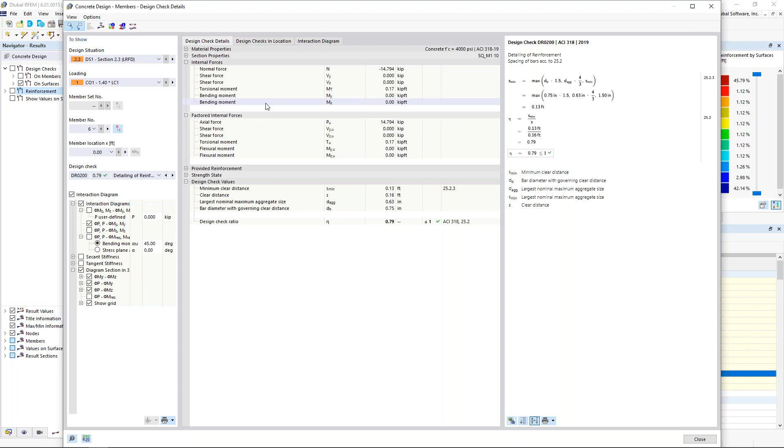But with our columns, what might be interesting to us is this new feature here within RFEM 6 for our interaction diagram. So this was long awaited, and we're very happy to present this now because we will see the interaction diagram available to us with this new tab and the 3D view here.

So we can view all of the values within table format, but we can also see where exactly we land within this interaction diagram for this particular member at this X location. We can add this information to our printout report, so very powerful there as well.

And of course, we have our design check ratios, our reinforcement that can all be shown graphically for the members that we covered in the first example. So the final thing to cover is just a quick few options with the printout report.

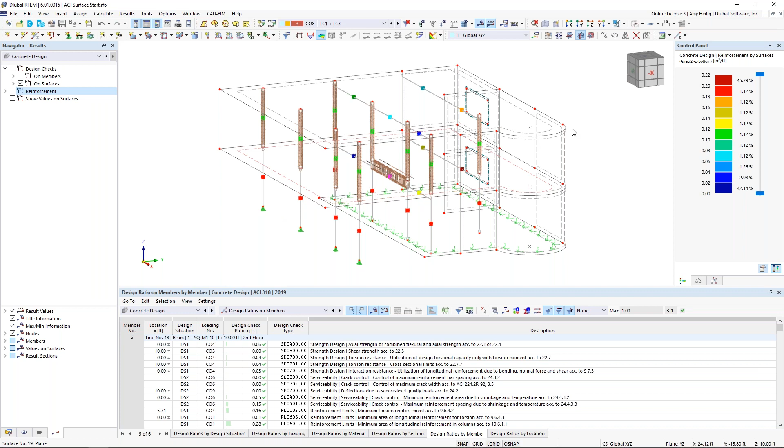So what I'll do is create a visibility here for my surface, and I want to hide these hidden objects in the background. I'm also going to adjust my view here to the reverse Z direction. For my reinforcement, I want to show all 4 of these options here for the required reinforcement in my printout report.

So the first thing I'll need to do is actually generate the printout report itself. Up here in our toolbar, we can choose New Printout Report. And we can see all of the various settings we can turn on and off within the model.

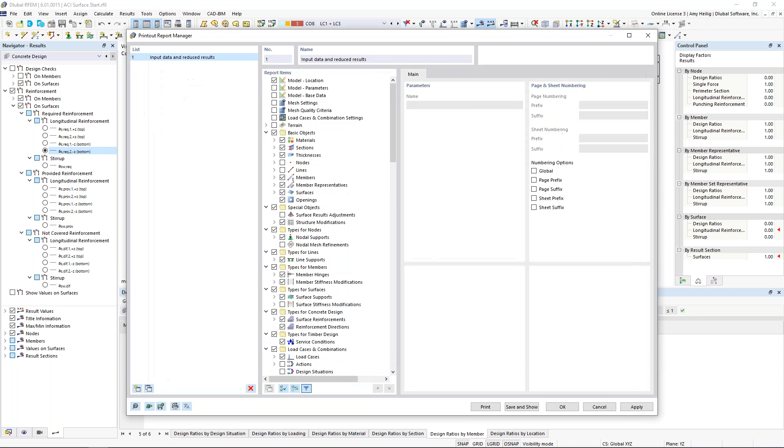Now we also have some saved templates here, so you can load one of those saved templates, or you can create your own template. We'll go ahead and work with template number 1, input data and reduced results. So I click OK, I click OK once again. So that printout report is now created in the background.

For my graphics, I'm going to choose my drop-down option here to print the graphics to the printout report. And what we'll notice is that I can set this to the full page height, and I've set this to the window filling so that it is nice and zoomed in here. And I don't want to just print this view here, but I want to take advantage of what's called the multi-print.

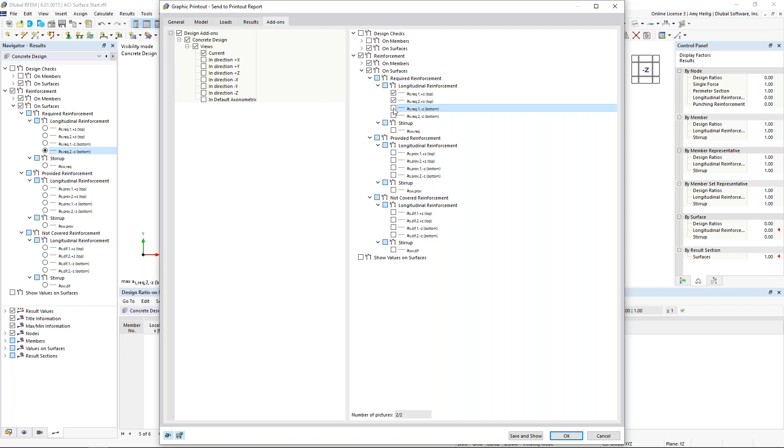So when I select this option, I now can visit this tab up here for my concrete add-on. Now all of the various options available to me here is exactly what we have available in RFEM that we covered. So what I'd like to do is activate for my printout the required reinforcement in both directions for the top and the bottom. So I click OK, and then what I should see down in the lower left-hand corner is the progress bar that has now added that to the printout report.

So if I go back to my navigator here, I can find that printout report available to me here. I can double click on it, it should go ahead and compile all of those results. We can see our progress bar here to open up the printout report in a separate application.

So we can see that application load, and I'm going to collapse our report navigator chapters just so it's a little less overwhelming here on the left-hand side. But this is going to show us, and I can zoom in here, all of the input data, including the results for our structure.

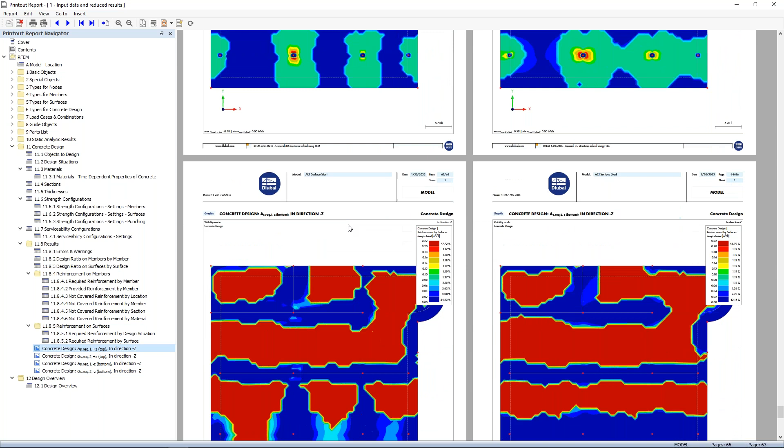But down here at the bottom are those 4 pictures that I just printed off based on that multi-print option. Now what's really powerful is that if I make any changes to this model, the program will automatically update these pictures, so we don't need to go in and print them again.

So once these pictures have been defined, what I can do here is just drag this printout report to my other monitor, because we can work concurrently in the program at the same time.

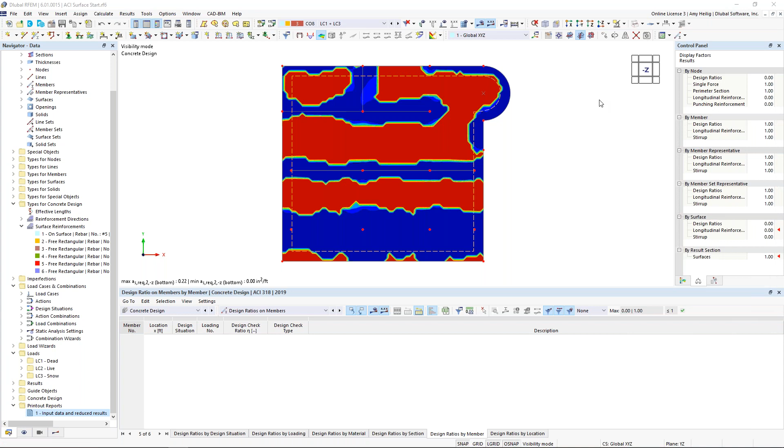So let me cancel out this visibility mode, and I'm going to go back to my results here, turn off my surface, and I'm going to select only my rib member, and I'll create a visibility by the selected objects. Additionally, I'm going to turn off that member reinforcement here, and we will choose our view in the Y direction, so just a simple wireframe view of that member.

Well, back under my results, I'm going to take a look at the design check ratios for this member. And I don't want the max, but rather I'm going to overlay here several of the design checks. And you can see again, these color codings will show me exactly which design check ratios I'm looking at.

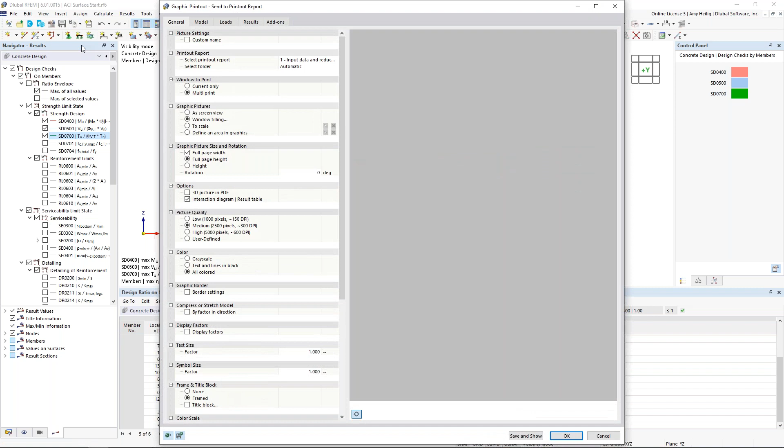So let us print this off to our printout report as well. So I go up here to choose print graphics to printout report. And this time though, we want to view the current view only, and I want to also modify this to not the full page height, but we'll choose 50% of the height.

So once I have these settings correct, I click OK. And what I'll do is drag this printout report over to the monitor so that you all can see it too. And we now have this picture automatically added to the printout report.

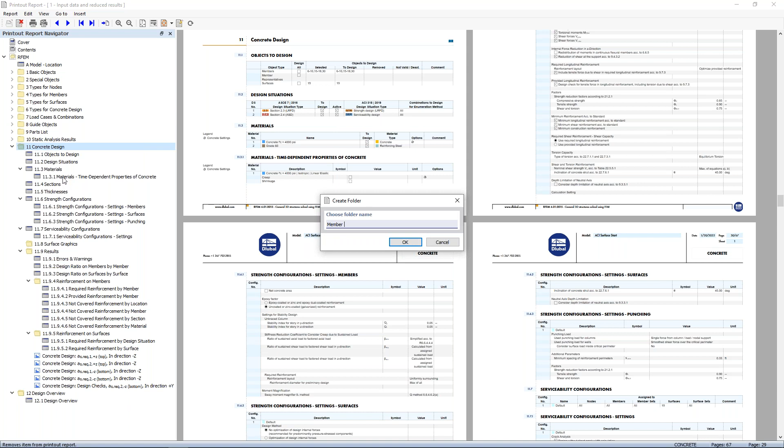Now we also can right click on any one of these folders to create a child folder. So perhaps we want to rename this to Surface Graphics for a little bit better organization. I can right click under Concrete Design, create child folder again. We'll call this Member Graphics. I click OK. And I can use my Shift key to select all 4 of my surface options here. I can drag and drop them into that new child folder, and the report will automatically update.

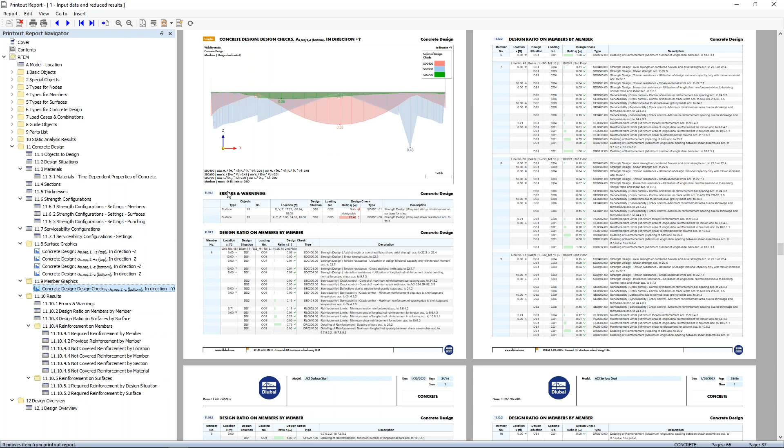For that rib picture, I can drag and drop that one into Member Graphics, and we can see here it's now added to that portion of the printout report. All of this information you can edit, including the logo, the cover page. We can modify this cover picture. Once you have the information set the way you like it, definitely save it as a template, and you can use that for any future models within RFEM.

So extremely powerful printout report. We did a lot of great changes with this new version. So certainly take a look at this. Okay, so we are ending the hour today, so I'm going to go back to the webinar.

One thing I just quickly wanted to mention before concluding the presentation is just some upcoming developments. So when we're looking at the ACI, I had already mentioned that punching shear should be ready in the next several weeks. So that will be something that we can look forward to. Chapter 18 for seismic design. We currently have the reinforcement detailing available to us, but we're going to continue expanding on these topics, including information like strong column, weak beam. The 2014 standard should be implemented relatively soon as well.

RFEM 6 was completely rewritten in an updated programming language. So we initially started off with the most recent standard, the 2019. We'll go ahead and add in the older version as well. And nonlinear concrete design is also in development. So this can actually consider the true cracked cross-sectional properties for members and surfaces for that nonlinear design.

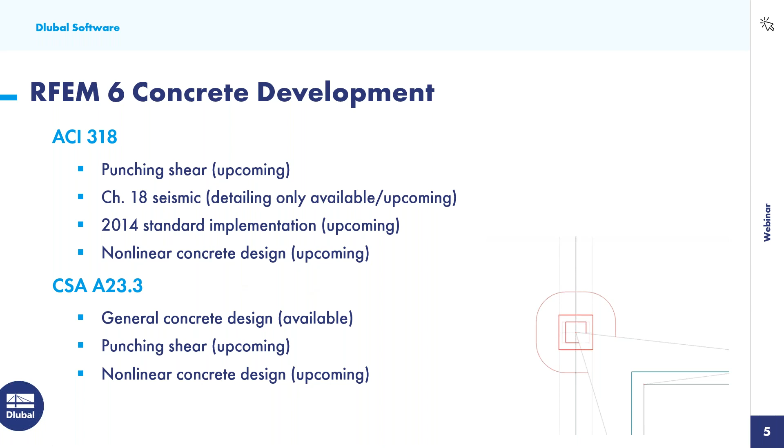CSA A23.3, everything that you saw today is also available for the Canadian standards. It's an identical workflow. We're just doing the design according to the CSA. The punching shear, that should also be available soon according to the Canadian standards, and nonlinear concrete design as well. So these are just some developments in the near future. Of course, we have longer term developments as well that are just a little bit further off.